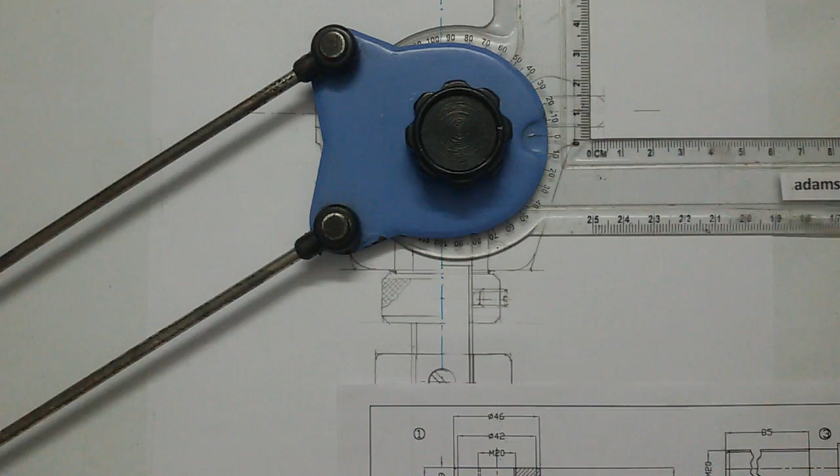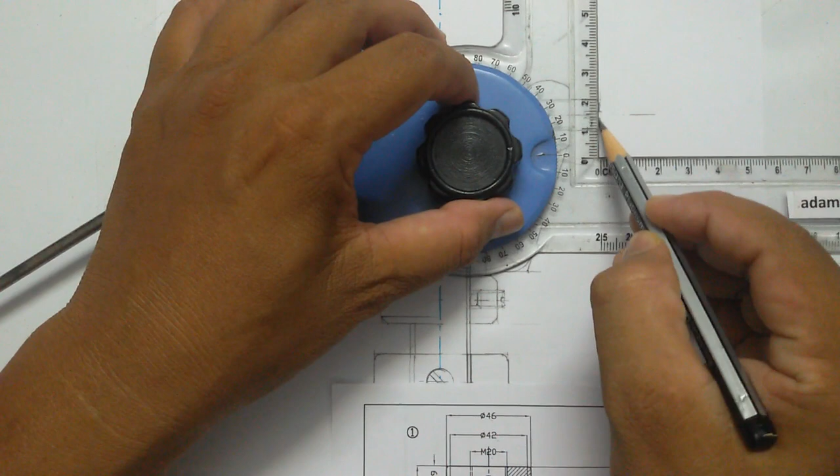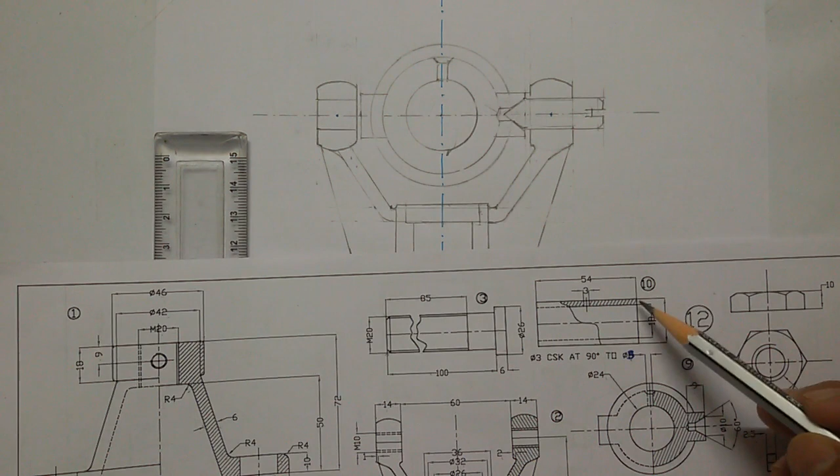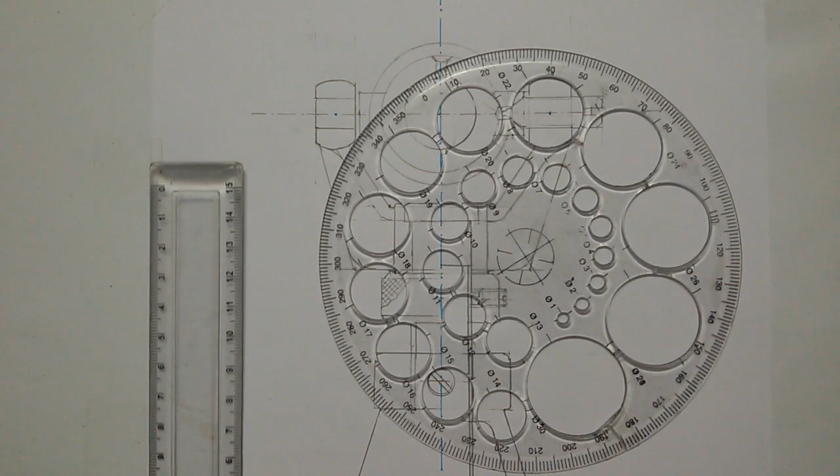Then you can see a bush made of brass material of outside diameter 24 mm and inside diameter 18 mm. This circle for 24 mm we have already drawn. So another 18 mm diameter circle we have to draw, because the bush will sit on this hole. So choose pro circle. This one is a 18 mm diameter circle.

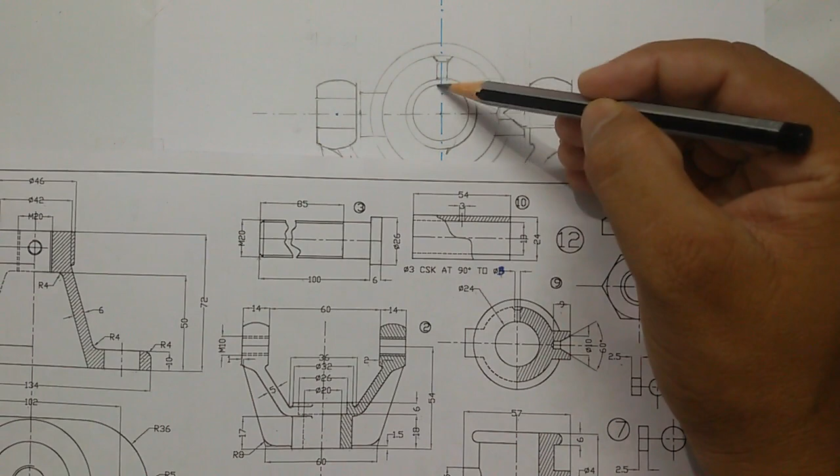And also you can see a hole of 3 mm on the bush. So you have to extend this hole, oil hole, on the bush also. Then you have to assemble this lock nut. The lock nut thickness was given 10 mm and the threaded diameter M10. So this lock nut will assemble here. So first mark a point 10 mm. From this line you mark 10 mm. Then draw a line.

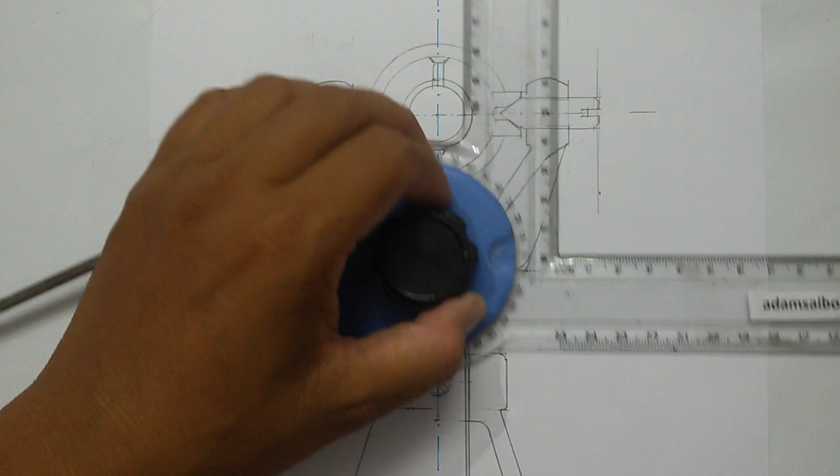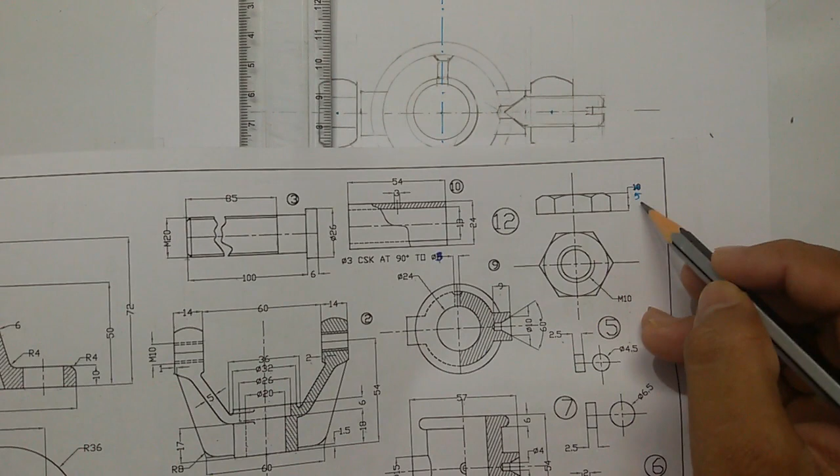Sorry, the thickness of nut was not 10, it was 5. So you mark 5 mm from here and draw a rough line. Then as the thread diameter was M10, the overall size of the nut will be 20 mm. So from here you mark 10 mm. From the center line you mark 10 mm above and below.

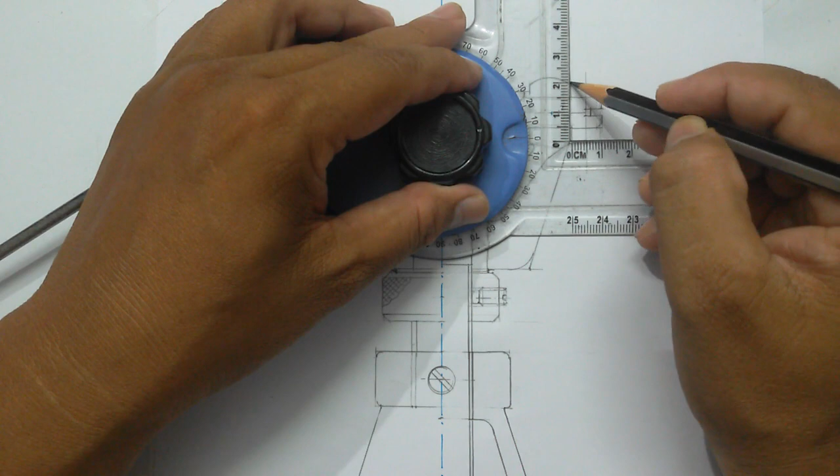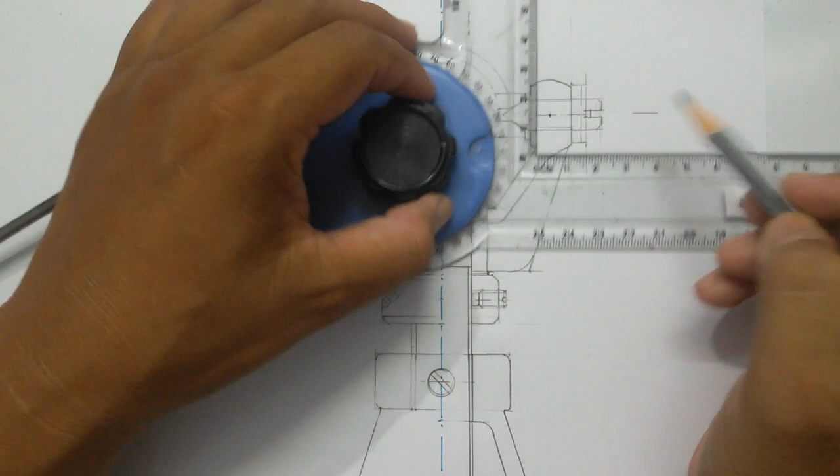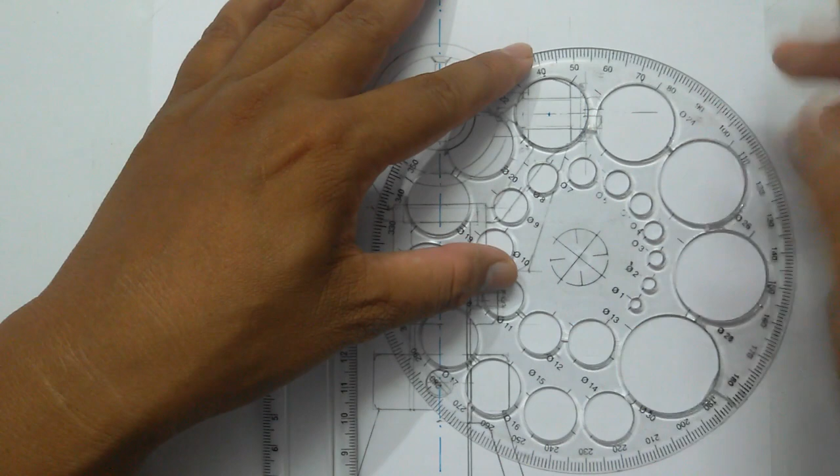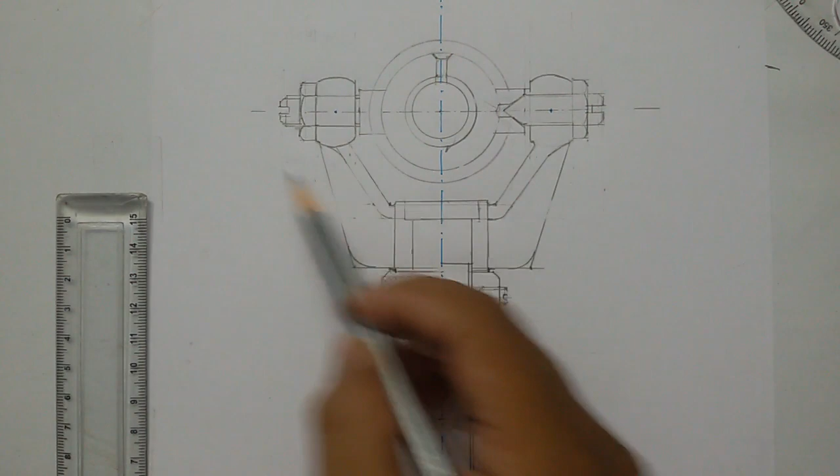Then this side was chamfered, so you can see 3 arcs here. Just 1.5 mm gap, you draw another line. So this distance should be approximately 1.5. Use a suitable circle to draw the curve. For the middle arc, you have to use some bigger circle. Similarly, you have to draw on the left side also. So I have completed on the left side also.

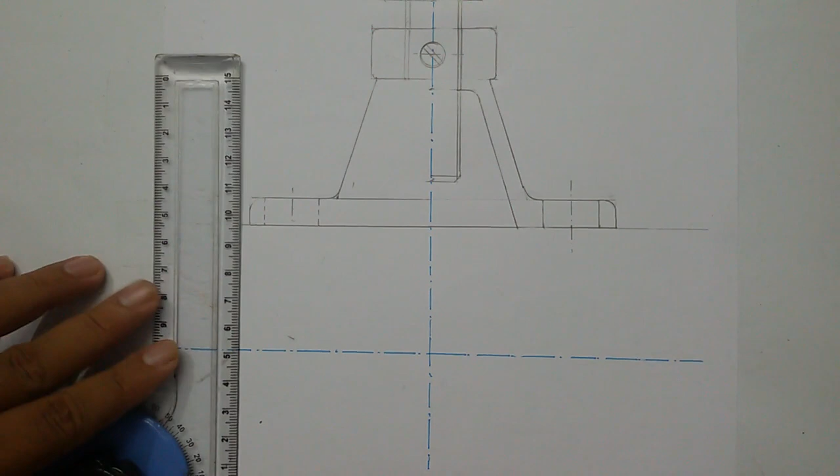As we are going to section on this right side, some of the lines are erased, and here you can see some of the lines are retained. So next we have to draw the top view. Project 2 lines from the front view.

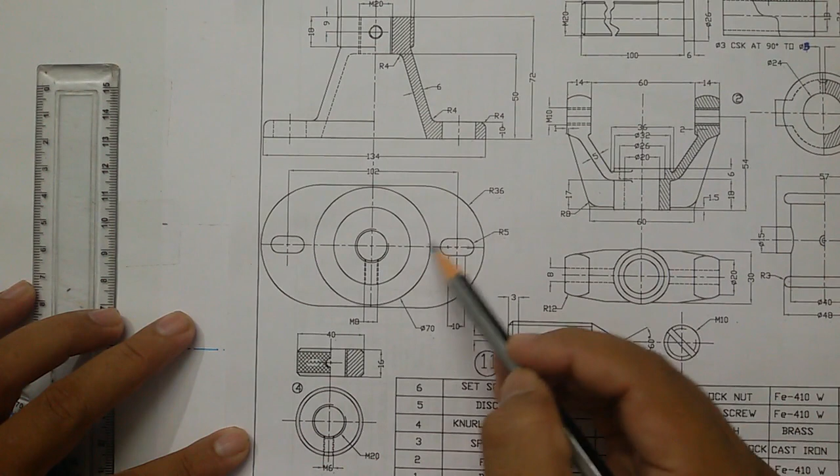So we will draw the base part. You can see this length is equal to 134, and this radius is equal to 36. If this radius is 36, then this distance will be 36 and this distance will be 36. So totally you will get 72 mm. From here you mark 36 mm and draw a line,

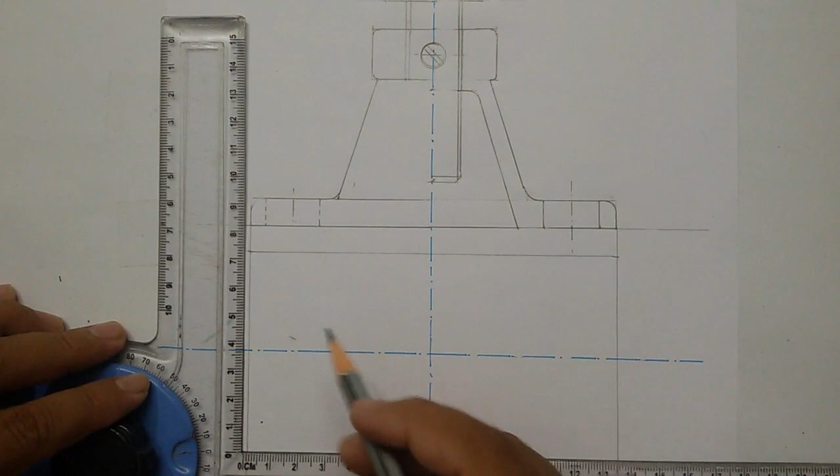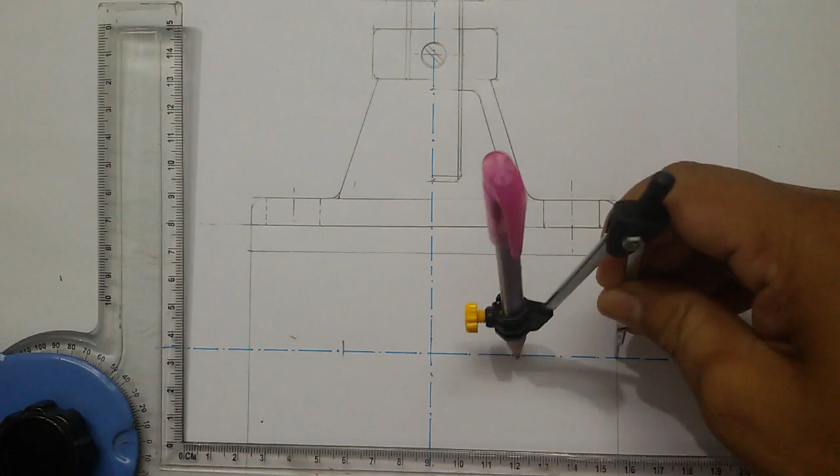and also at the bottom use compass, measure this distance and cut an arc on the center line to get the middle point. Similarly on the right side, then keep your compass over here and draw a semicircle. Similarly on the right side.

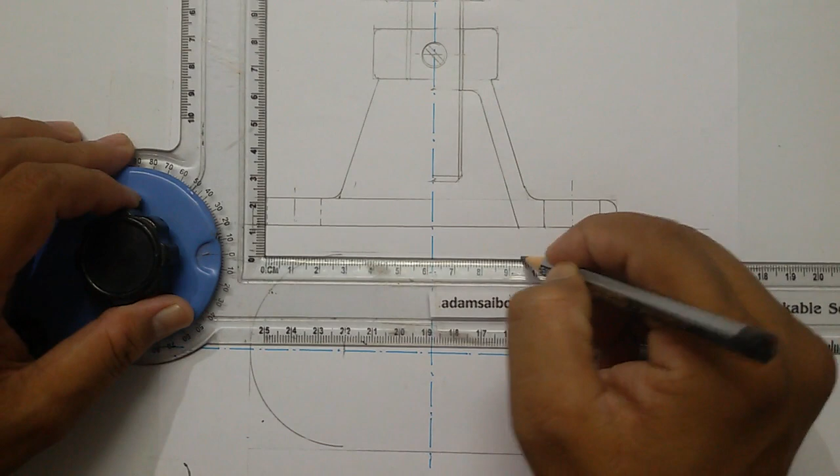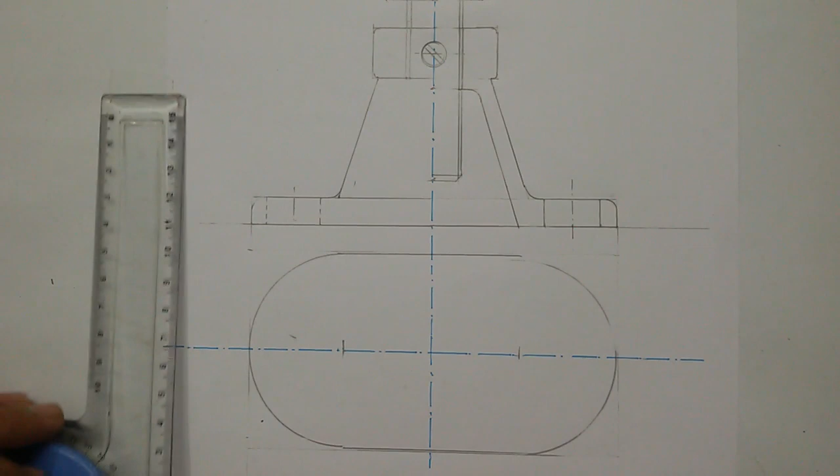Next you can see a circle here. The circle diameter was given 70, then the radius will be 35, so mark 35.

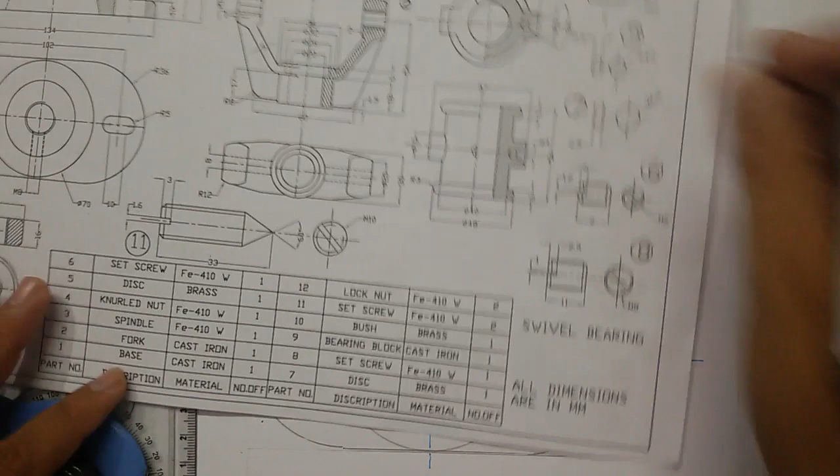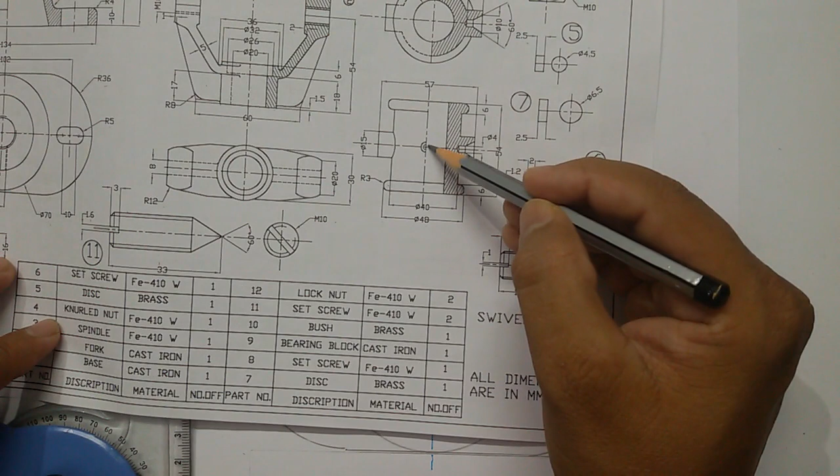Next, the ninth part, bearing block, is coming at the top, so this top view we have to draw here. Here you can see two circles mentioning oil holes. So inner circle diameter was 4, outer circle diameter is not given, we can take it as 6 mm. 4 mm diameter circle, 6 mm diameter circle.

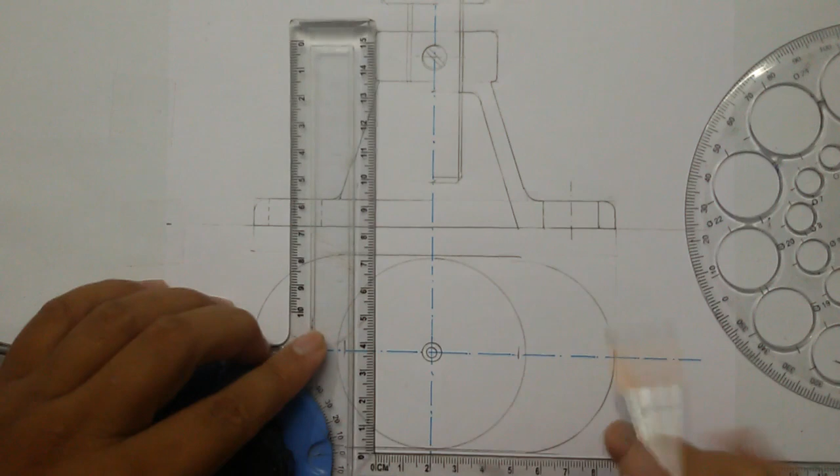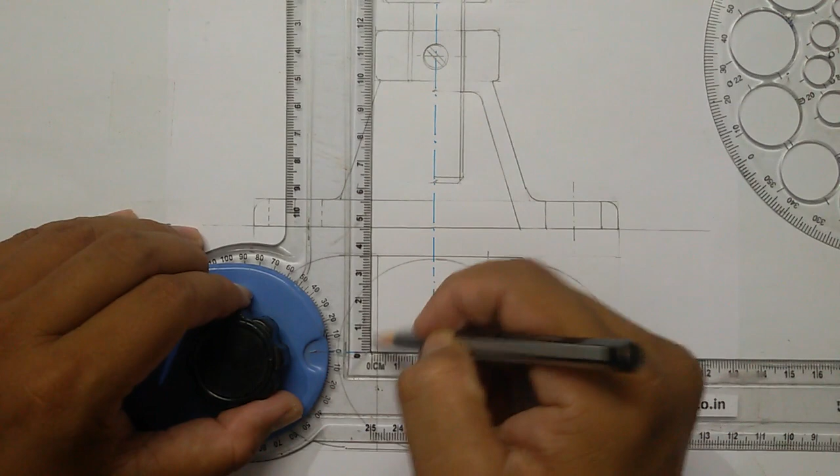Then I am going to draw these two lines 40 mm diameter, so this distance is 20 mm, 20 mm. So this distance should be 40 mm, and I am going to draw this distance given 54 mm. Half of it is 27, so from here you mark 27 and draw a line. Similarly on the other side.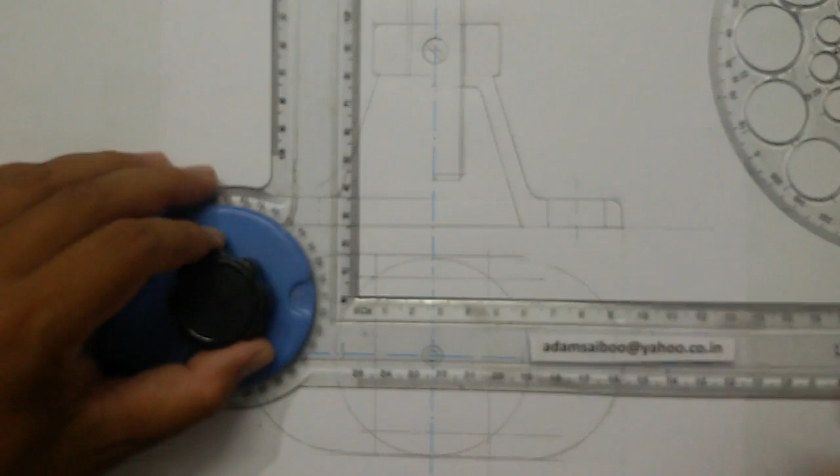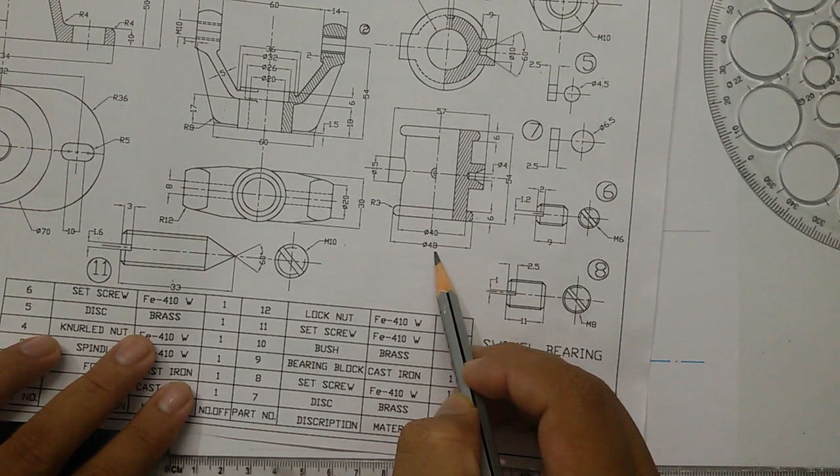Then this thickness was given 6 mm, so I am going to draw this line. From here you measure 6 mm and draw a line. From here you measure 6 mm and draw a line above it. Then you can see this distance was given 48, so from the center line it will be 24 mm. So from here you mark 24 mm and draw a small line. 24 mm.

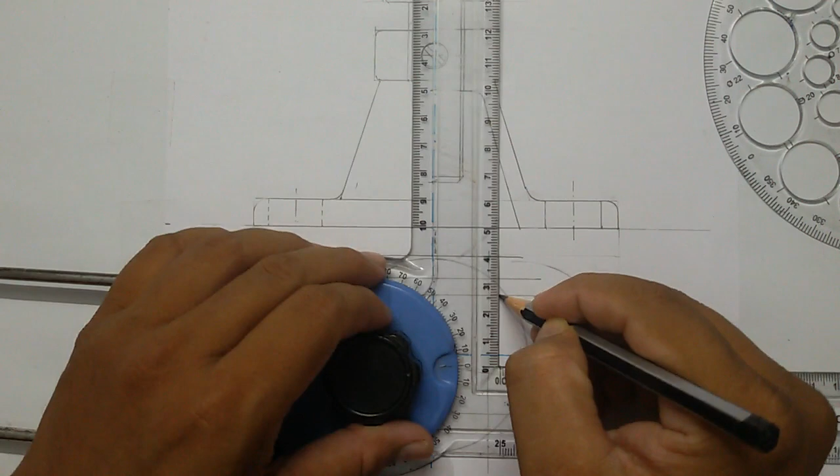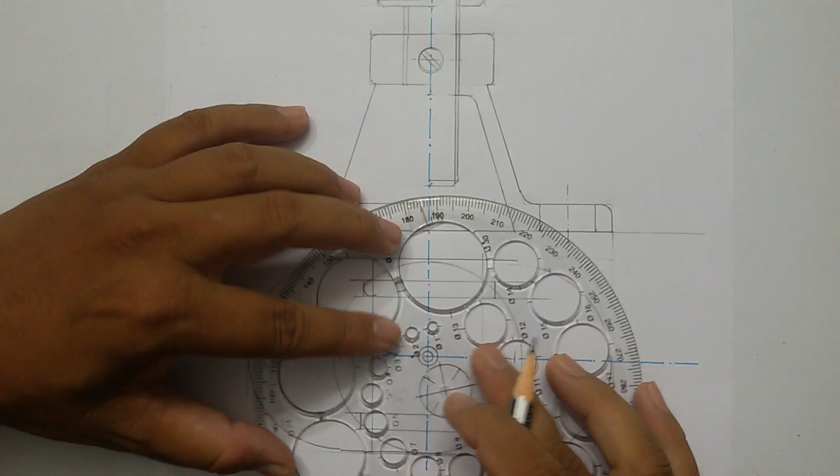Use pro circle to round this corner. Draw semicircle. The diameter of circle chosen should be 6 mm. The circle diameter is 6 mm.

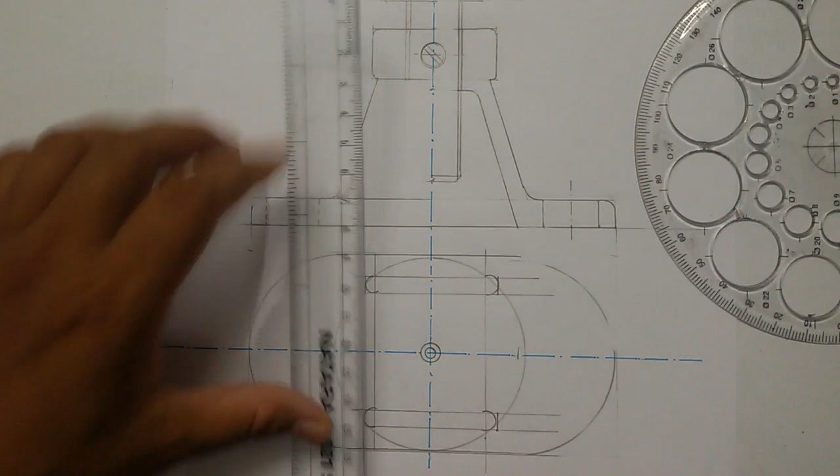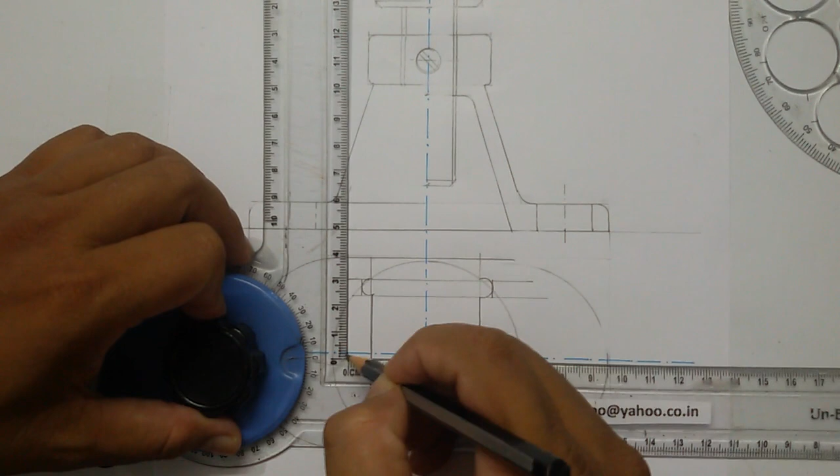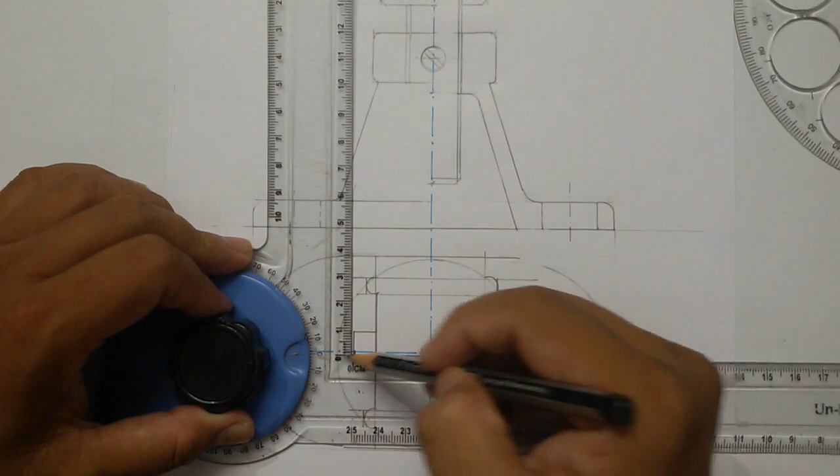Then I am going to draw this boss. So the distance is given 57 and the diameter is 15 mm. 57, half of it is 28.5. 28.5, mark a point. 15 mm, half of it is 7.5. 7.5, 7.5. Similarly on the right side. From here 57, 15, half of it is 7.5, 7.5.